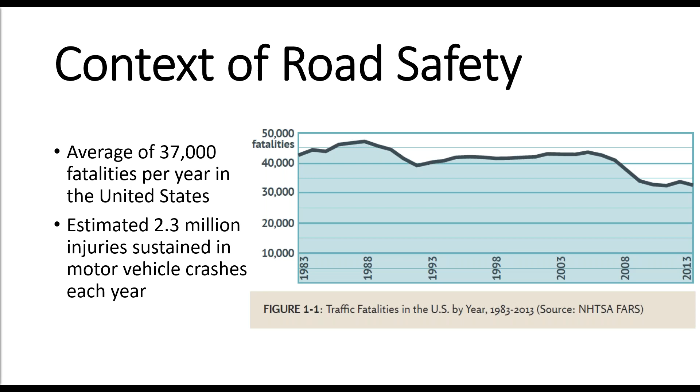Now, when you look at this graph, you can see how back in the late 80s, the numbers were peaking up pretty high, and we've dropped it down some. Over the last few years, it dropped a little bit more, but then it's trending back up again. So we need to continue to push it down, especially if we want to get anywhere close to Vision Zero, where we have no fatalities. And so that is where we want to be, but we're a long way from it when you've got 30,000 plus dying on the roadways each and every year.

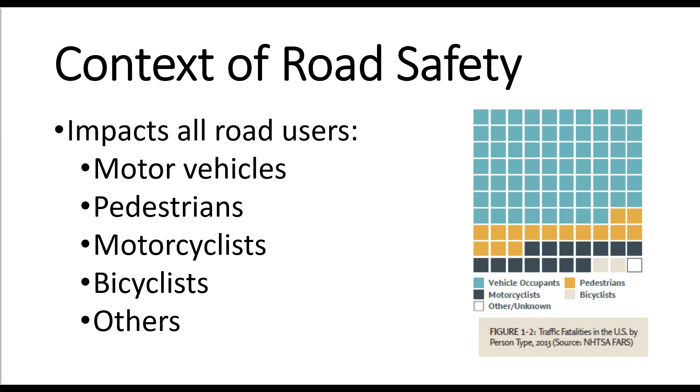It's really interesting when you consider the fatality rate, because we have so many vehicles and they're traveling so many miles. It's so easy to travel, with our interstate system and the great facilities that we have. I travel a lot, and may travel 400 or 500 miles a day sometimes to go to different places. But we've been so successful in making our cars safer and making our roads safer, we've dropped the fatality rate down to about 1.0 fatalities per 100 million vehicle miles.

And you can see back in the 60s, it was up over 5.5. So imagine if we had 5 times the fatalities that we have now. So instead of 37,000, close to 200,000. That would be just a national disaster. So it's good that our rate has declined, but the bad news is our rate of decrease is declining, that we're kind of bottoming out. And so we need to really come up with some new treatments, some new thinking to continue to push that down.

1 fatality per 100 million vehicle miles of travel may sound pretty good, but still 37,000 people is a lot of people dying each year on the highways. And so we still got a lot of work to do. And the only way we do it is working together and sharing information like this, learning and applying what we learn to make our roadways better.

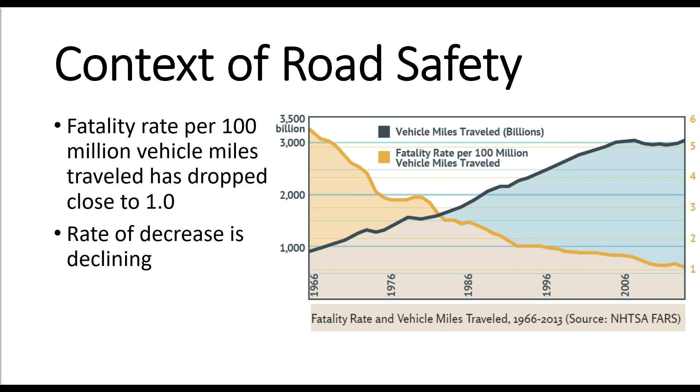Now, if you learn nothing else, we need to understand the difference between nominal safety and substantive safety. If you learn nothing else from this webinar, I hope you grab hold of this, because this is really important, and it is a different way of thinking than what we traditionally think. Nominal safety is just meeting the standards. One of the really classic examples is clear zone width. If you have something that's outside the clear zone, it's safe. But if it's inside the clear zone, it's unsafe. That's nominal safety thinking. And reality is, it's not like that.

So let's say you've got a freeway facility and a 36-foot clear zone. Well, if you have a tree that is at 36 feet 2 inches, that's really no different than a tree that might be at 35 feet 10 inches. Really the probability of that tree being hit is very, very close. In one case, I'm 2 inches outside the clear zone. In the other case, I'm 2 inches inside. In one case, you say, gosh, that's unsafe, and the other, oh, that's safe. And in terms of real crash experience, there's virtually no difference in that.

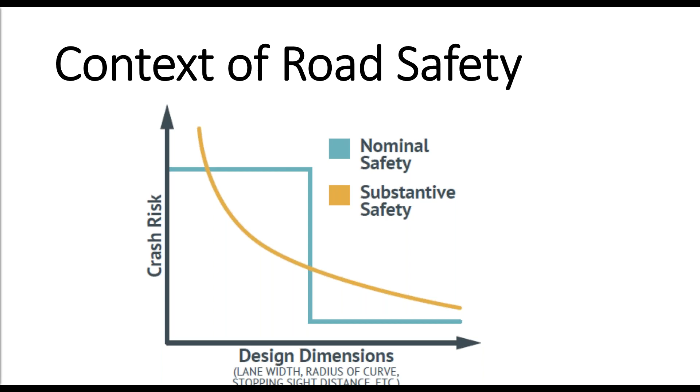We need to go beyond meeting the standards to, are we really providing a safer roadway environment? Are we doing the best we can to make the environment as safe as we possibly can? All right, so that's really the context of road safety.

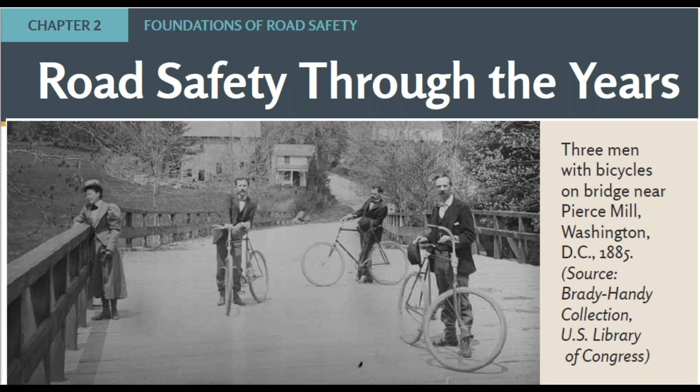And again, currently we're at about 1. So imagine again, 24 times the fatality rate. That would be something critical. And so it's good that we have reduced that fatality rate per 100 million VMT way down. And it's great that we've come from 24 down to 1. But again, we've still got a long, long way to go if we're going to get anywhere close to Vision Zero.

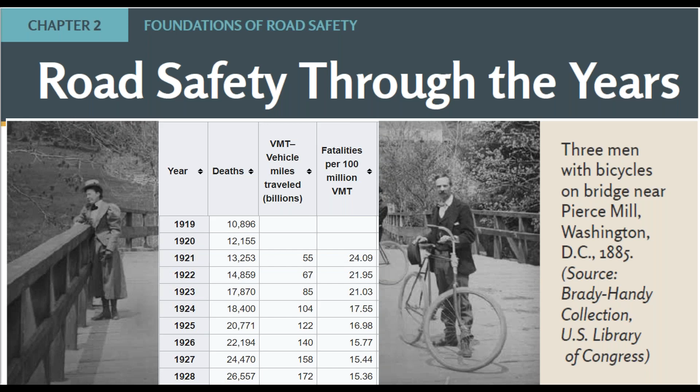And the great thing working with Rudy, it talks in the book about this first national conference on street and highway safety held back in the 1920s. Now, Rudy wasn't there, I don't believe, for the conference, but when he was at Federal Highways, in the archives there at Federal Highways, they had the notes, the handouts from this first ever national conference on street and highway safety. And Rudy's got some pictures in here from the handouts from that 1924 conference, and great history here.

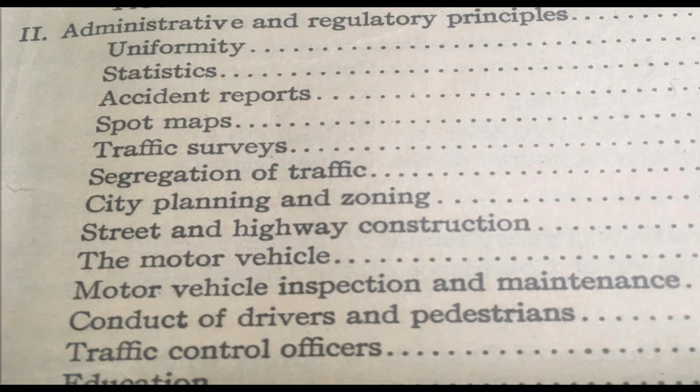And then they come up with suggestions for cooperative work, different associations, unofficial organizations; the automobile manufacturers had work to do, insurance companies had work to do. And so lots of different people, a multidisciplinary approach, and we still talk about that today, a multidisciplinary approach to this. And again, this is the foundation. This is how we started trying to make our highways safer.

A little bit later, 1954, a White House conference on highway safety. So again, it's at the presidential level saying, hey, we've got to do something to make our roadways safer. We need to do something nationally to improve the safety of the transportation experience in America.

Then it continued in 1966, President Lyndon Johnson signing the National Traffic and Motor Vehicle Safety Act of 1966 and the Highway Safety Act of 1966. So you can see over the years all the things that have gone into creating what is the Federal Highway Administration, NHTSA, and all these other things, and the Federal Highway Safety Program. And the book gives you a nice timeline of some of the different things that happened.

1893, the Office of Road Inquiry is created, which would eventually become FHWA, the Federal Highway Administration. And it's not until 1908 when the Model T is released, the first affordable automobile, due to what Henry Ford did in terms of the assembly line and mass manufacturing. Before 1908, before the Model T, only the really, really rich folks could afford cars. Everybody else was on horse and buggy and those kind of things.

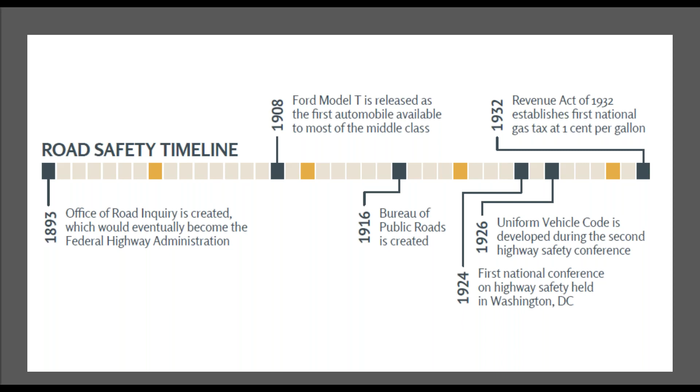1944, Congress approves the development of the National System of Interstate Highways. That's an interesting story in and of itself when you start really seeing where the interstate system came from. Basically, it was a big push by Eisenhower. When he was, I think, a corporal or something early in his military career, he was charged to take a convoy across country.

And the connectivity of the roads back then, when he was just a youngster in the military, was terrible. He would go from state to state, and some of the roads, there'd be asphalt for a while, then they'd turn into dirt roads, and then they'd suddenly end in some field somewhere. And so he'd have to turn this big, huge convoy of military vehicles carrying all this stuff all around, backtrack to find another road to connect. Because certainly back then you didn't have Google Maps or anything like that leading you. And so as he went from state to state, the roads didn't really connect real well.

And he remembered that. And when he was in World War II and saw some of the highways in Germany and how well connected they were and how easy it was to move troops and equipment, he said, hey, this is something we really should bring to America. And so the National System of Interstate Highways originally was largely designed to move troops and equipment in preparation for war. But again, you can see how much it impacts our lives today. Being able to travel on nice interstate facilities and go quickly from place to place certainly has impacted our lives drastically.

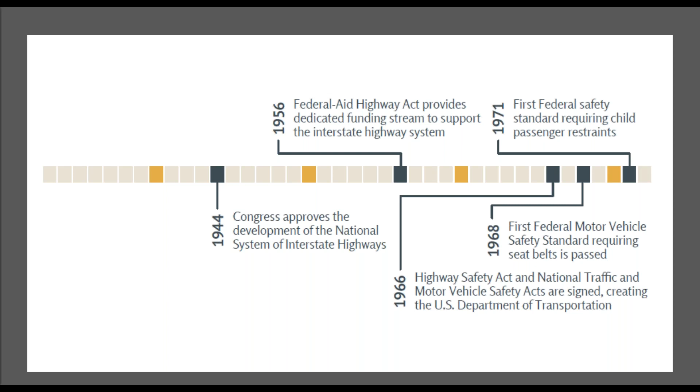In 1973, the oil embargo leads to the energy crisis and the national maximum speed law. Some of you may be old enough to remember when 55 was the maximum speed limit on the interstates, the freeways in America. 1974, the first safety standard requiring motorcycle helmets is passed. And then as we go on, ISTEA is passed, gas tax increased up to 18.4 cents per gallon. I believe that's the last federal gas tax increase that we've had.

1995, we repeal the national maximum speed limit, and so the states raise their speed limits. TEA-21 is passed 1998. SAFETEA-LU is passed in 2005. 2012, MAP-21 is passed, which brings us up to our current level of federal legislation. MAP-21 and SAFETEA-LU, those federal legislation did a whole lot to improve traffic safety and had a lot of funding specifically for safety programs, again, focused on making our roadways a lot safer.

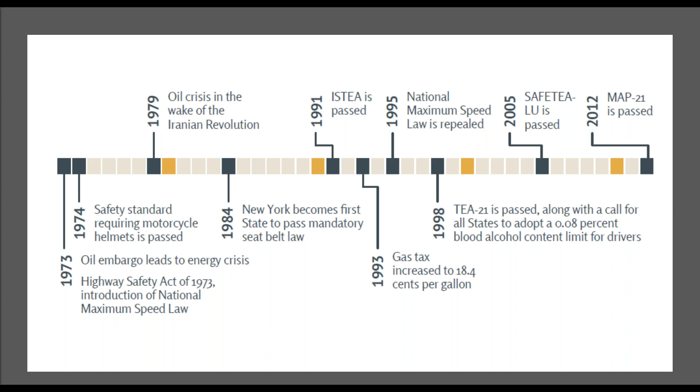All right, chapter 3 gets into multidisciplinary approaches, and talks about the 4 E's of safety. If you've been around safety for any length of time, you hear about the 4 E's of safety: engineering, education, enforcement, emergency response. And there is a 5th E, and the text talks about the 5th E being evaluation, that you evaluate your program and then continue to refine it. Well, I think each of those 4 E's should be doing their evaluation of how well their program is doing. I like to think of the 5th E as everyone else, because it doesn't matter how well we engineer it, how well we educate people, how severely we enforce it, and how great our emergency response is.

It really doesn't matter; if the people aren't doing their job, the drivers, the pedestrians, the bicyclists, if they're not thinking safety as well, our system isn't going to work well. And so really, I think the 5th E should be everyone else.

And I did a webinar a year or 2 back, I think, on the 5E approach to safety. And again, talked about that 5th E, which is everyone else. And again, we can do all the engineering we can, but if the people don't know what to do with what we engineer, don't know how to respond, or ignore it, then we haven't really done anything. And so we got to get everyone on board if we're going to get anywhere close to Vision Zero.

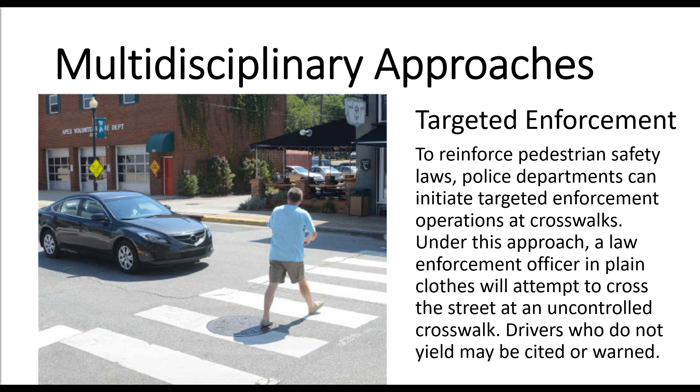But again, it is a useful tool for the law enforcement agencies to help people understand their responsibility as drivers to yield to pedestrians in uncontrolled crosswalks like that.

One of the other things, the Click It or Ticket campaign, it's a national campaign, and it really brings awareness to seatbelts, that seatbelts are required in most states, I think all states now. Seatbelt use is required, and it does really help the survivability of crashes if you are wearing your seatbelt. And so again, the Click It or Ticket campaign is all about just being visible and getting people's attention to, hey, go ahead and buckle up.

And it is something, like I said, it's a national thing. You see it all across the nation. Click It or Ticket, and you'll see it on the dynamic message signs as you're driving down the highway, and the police will get out there, the highway patrol will get out there and enforce it.

And we also want to mention Florida's Strategic Highway Safety Plan. One of the things in the history of the safety programs is that all states now are required by Federal Highway to have a strategic highway safety plan. And that was one of the things also in the download pod, Florida's current Strategic Highway Safety Plan. And again, we want to approach this strategically in a multidisciplinary approach, really trying to do all that we can, all the different people rowing in the same direction to try to reduce the number of crashes and reduce the severity of crashes on our highway system.

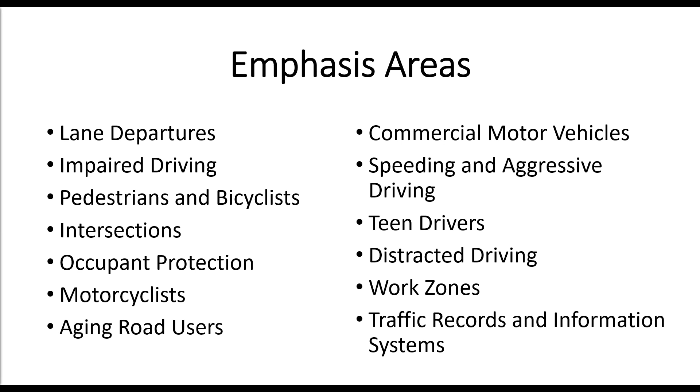All right, chapter 4, let's look at the road users. Road users includes people like passenger vehicle drivers and occupants, drivers of trucks and large vehicles, motorcyclists, pedestrians, bicyclists, and certainly others. You can include things like e-scooters, skateboarders. There's lots of other things out there that are road users that use the roadways for transportation. And each of them has different needs, different things that we may have to do to accommodate them.

And one of the things I always like to say when talking about roadway design is all of the road users, whoever they are, should know when to go, where to go, and how to go. That should be really clear. It should be something they understand when they're supposed to go, where they're supposed to go, and how they're supposed to go. The roadway environment around them should give them clear information, how fast they should be going, where they should go, at a traffic signal, when it's your turn to go, and those kind of things.

And so if we're going to have all these different people operating together in our road system, they need to know where they belong to be, where they should go, when they should go, and how they should go. And so that's an important part of really doing good design, is making sure that we really communicate clearly to the road users how they're supposed to use the road.

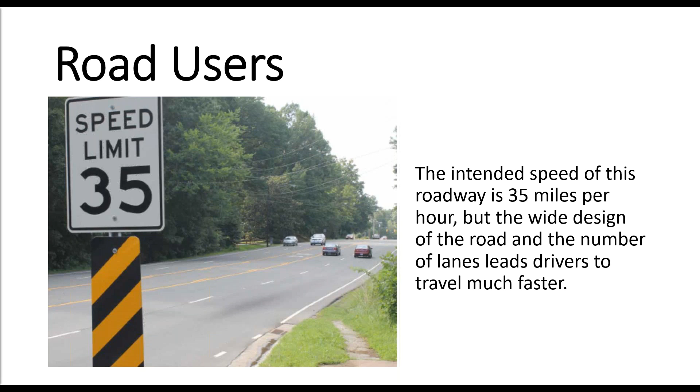And what they found by going to this road diet at this location is that it resulted in a huge decrease in the 85th percentile speed. It basically kept the same roadway capacity. The number of bicyclists on this corridor increased 35%. Pedestrian crashes declined by 80%. And so it made it a whole lot safer, made it better for all the road users. They know now where to go, when to go, and how to go.

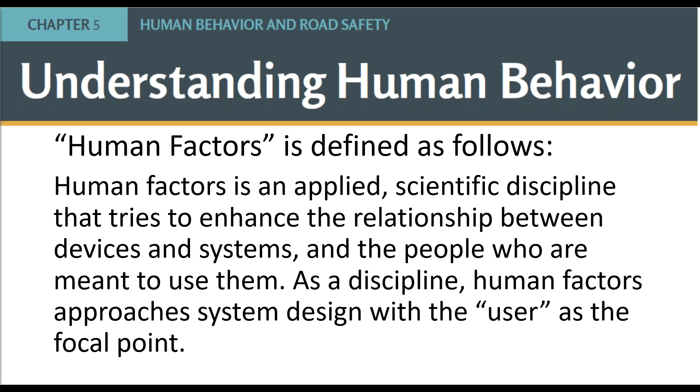Key principles: human factors, or human behavior, is guided by two different systems. Your behavior is guided by the intuitive system and the deliberative system, and we'll come back and talk about those in just a couple minutes. Humans are not exclusively logical, rational beings, even each person. Some days we're more logical and rational than others.

If we're upset at something, or we've had a really bad day, we may not think rationally, we may not act rationally. And if we're having a good day, maybe we're thinking rationally and logically, but other days we don't act so rational or logical. Human behavior is heavily influenced by the environment, by things that go on around us.

That's certainly true. And humans do make mistakes. We all do make mistakes. Either we're not paying attention, we're not thinking about what we need to be thinking about, we're thinking about something else, or we're not thinking clearly about what we need to think about. All of us as humans do make mistakes from time to time.

But one of the key things is the intuitive versus the deliberative side of things. The intuitive system is implicit. You don't really think about it. It's unconscious processing by which you make nearly instantaneous decisions and take a resulting action. Whereas the deliberative system is a conscious system wherein a person considers information using rational thought, logic, and reasoning in deciding on an action. So intuitive, you just know what to do and you do it. And deliberative, you've got to think about it and process it.

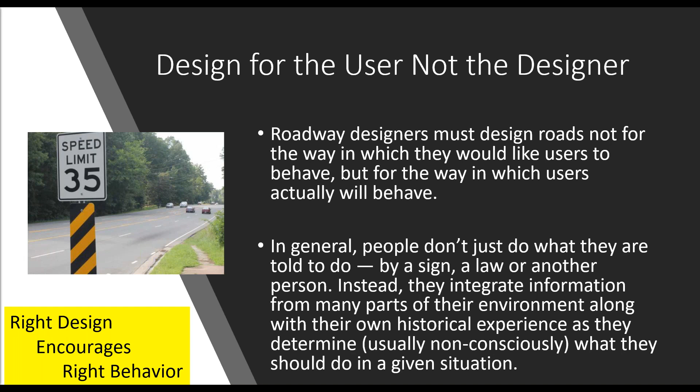All right, next chapter talks about changing human behavior. How do you change human behavior? Well, if you change the environment, you change things around people so that they make different choices. That's certainly one way to do it. Change the environment. You can educate them. You can provide safety messages and raise awareness, or you can do the brute force way, which is enforcement.

So, heavy police presence will get people to slow down on a roadway. I mean, like I said, welcome to Waldo. If you're familiar with Waldo in North Florida, they aggressively enforce the speed limit there. And people would typically drive a lot faster through Waldo, except for the fact they are known as a speed trap, if you will. And so when you see the sign, welcome to Waldo, you hit the brake and you slow down because they aggressively enforce the speeds there.

But that is really the brute force way, and something a lot of agencies really aren't willing to do, because people then complain, you should be out solving this crime or that crime and not just ticketing people. But I don't know, there's a lot of good research that actually supports it does make your community safer if the agencies are aggressively enforcing speeding. And we can talk about that later if someone has a need to or want to.

All right. Some of the things that do influence our decision making: what's convenient for us, previous experience in a similar environment. Sometimes we're under time pressure. We're in a hurry to get something done. If we've had education and know how to do things, our emotional state at the time certainly does impact things.

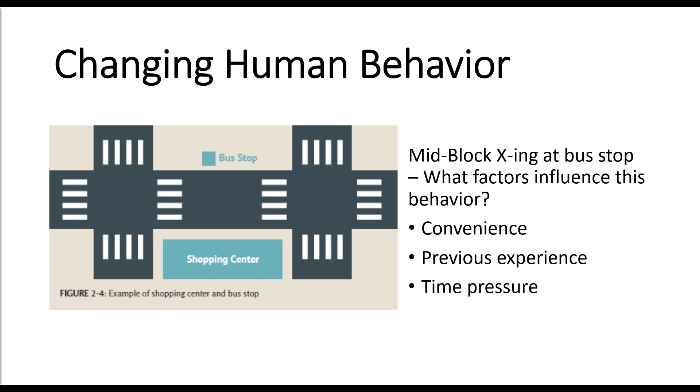And so how do we change that? That's a tough question, isn't it? And something we continue to struggle with. Again, like I said, right design encourages right behavior. And like we said, humans are not exclusively logical, rational beings. People generally don't just simply do what we're told. Changing behavior requires understanding all these influencing factors. And if you can't change the person, and usually you can't, change the world around them so that they will follow. So you have to change the environmental cues around them. Because again, right design encourages right behavior.

All right, that was quickly through Unit 2. Any questions there on what we covered? There was a lot of interest in the optical speed bars. Some follow-up questions that were coming up: Can they be used on tangent sections as well as curves? And are there studies showing their effectiveness on curves versus tangent sections?

I'm really not sure. Like I said, there is some information in the MUTCD about when to use it, where to use it. I've only seen it applied on curved sections where you're really trying to slow people down going into a curve because there's a history of people driving too fast and sliding out of the curve. And so it's something that's been implemented as a particular countermeasure in curves. I really don't know if doing it in tangent sections has really been studied.

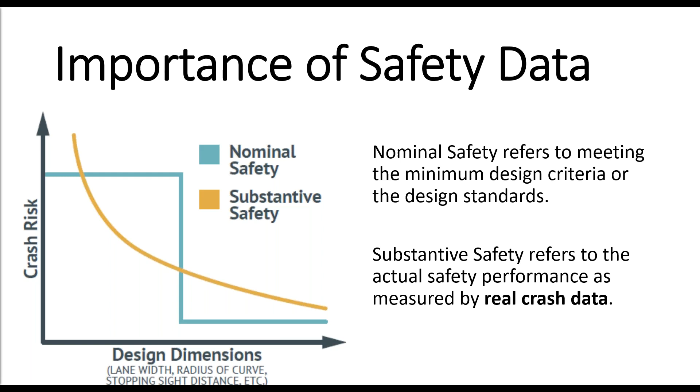The easiest thing to do is step up your analytics, your analysis of the data, because sometimes getting good data takes time and money. But again, studying a book like this book can help you do a better analysis. So even if you have low quality data, if you do high quality analysis, you can recognize the limitations of the data that you have, and you can still get some useful results that'll help you move in the right direction. But again, the thing you want to work on there is improving the data quality so you can make better decisions.

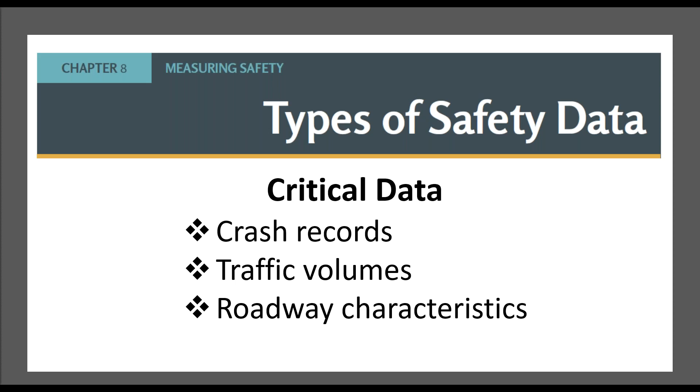And that's a data-driven analysis, and will give you the best type of response to the crashes that you're experiencing there. So the next chapter talks about the types of safety data. And some of the critical pieces of data are the crash records. That's where you really learn the most, is reviewing the crash records. What are the traffic volumes on the roadway and some of the characteristics of the roadway? And certainly the crash records.

And again, having good crash reports just really helps you figure out what's going on. What are the things I need to be looking for? What are the things that may have influenced this crash? And there's all kinds of things described on the crash report. What are the lighting conditions? Was it light or dark? Do we have street lighting? Is it a situation where you might have glare?

Then the weather conditions, is the road wet or is the road dry? Is it some other windy blowing condition or something like that? And so all these different things can impact what the correct countermeasure is at a particular location. What's the roadway surface condition? Were there heavy vehicles involved? Were there school buses involved? And all these different things help you identify what may have contributed to the crash, so that I can come up with the solutions I may want to try to reduce this type of crash.

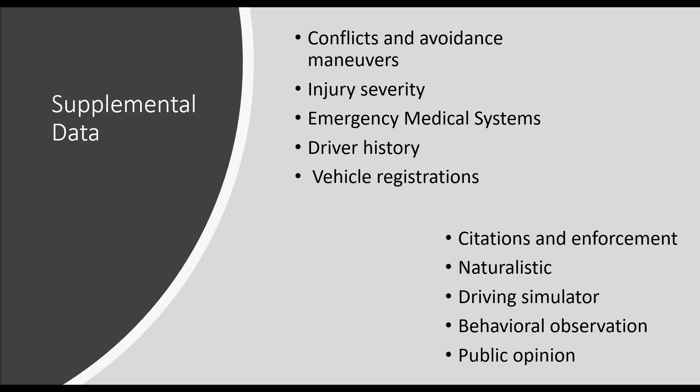In the crash data, again, looking at the crash form, you'll see a description of all the things that may have influenced the crash. The data collection process is something the police officers are trained in, what data to collect and how to collect it, and it's a very elaborate training that the responding officers go through for putting that data into the form. It's a very robust training they go through in order to know how to fill out that form.

We're going to talk about the common data elements, the MMUCC, and that's something, if you're going to be taking the RSP exam, you need to know what that is, and we'll talk about that in a few minutes. Whenever you have crash data, what are the sources of data and who keeps the data? And is the data safe and secure, and is it reliable?

We'll be talking about the transportation safety applications and coordination of the data with other agencies. And we'll talk some about the data challenges and the gaps, because that's always an issue. What gaps do I have? Where am I missing data? What's the data that I don't have that would help me better understand the crashes?

Traffic volume data: typically, we have AADTs, the annual average daily traffic, for most of the roadways in Florida, at least the state roads. The DOT tries to maintain a database of that information. The AADT is the annual average daily traffic. Basically, you take the total number of vehicles that go across that section of roadway over the course of a year and divide it by 365. Of course, for 2020, you would divide it by 366 because we have a leap year, but it just assumes a uniform number of vehicles per day throughout the year.

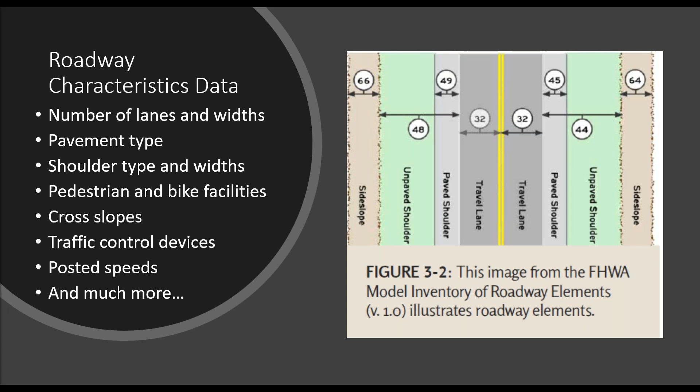And really, the types of safety data we need: traffic volume data, crash data, and road data. So we need the crash reports, how many vehicles or pedestrians or bicycles or trucks are out there, the volume data, and what the roadway looks like. All three of these realms are important data to analyze if we're going to figure out what's going on and understand the crash experience we're seeing there.

All right, Chapter 3 talks about improving safety data quality. To have good safety data, you need timely data. That means it's fairly current. For many, many years, the crash data we got was not timely at all. It would take 3 or 4 years before we got the crash data, and by then you've already done something to the roadway or something has happened and changed things. So you really need good timely data, as current as you can possibly get it.

It needs to be accurate. It needs to be complete. That's one of the things with the Florida crash form. I forgot how many data fields are on it, but there's lots and lots, hundreds. And the officers get tired of filling all that stuff out. But you need all those things filled; it's all useful information on that form. So the crash data needs to be timely, accurate, and complete.

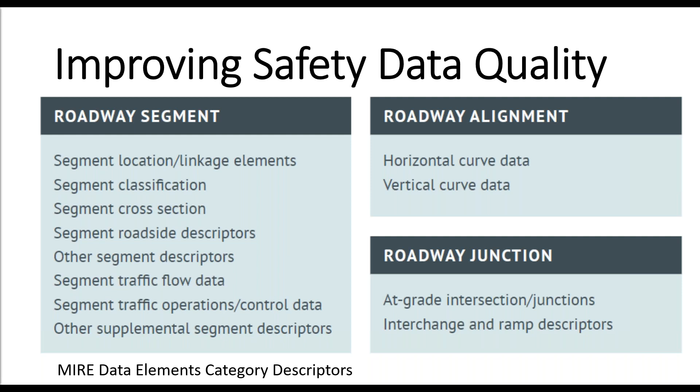And roadway segment data, the alignment of the roadway, are there horizontal curves, vertical curves, or is it an at-grade intersection, and so forth. And so again, MIRE is basically the same thing as what we saw with the MMUCC, uniform data, in this case describing the roadway elements. That's what MIRE is all about. All right, that was Unit 3 real quick. Any questions, Anthony, on Unit 3?

There's a comment in the chat saying that people have had different experiences. There's more than one comment in there saying that they've looked at different locations and different municipalities, and the inconsistency in the crash data is frustrating, with regards to the conditions of the roadway and things of that nature. So the efforts to standardize that are definitely welcome.

Yeah, absolutely. Different cities and different municipalities had different standards and different quality of crash data. And that is the real emphasis behind some of these things, the MMUCC and the MIRE, is to standardize these things so we are all talking from the same frame of reference. So, is there a list of compliant states that these guys develop? Here's the minimum number of required fields for a crash report form, and then states can add to it, or how does that work?

I believe they are tracking some of that stuff in the roadway safety fundamentals document. It talks about MIRE and the MMUCC in some detail, and it points you to, I think, some websites that talk about states that have fully implemented it and where the different states are in implementing it. So again, I'd point you to the text. The book has a whole lot more information and points you to websites and other reports that could really answer that question better than I can.

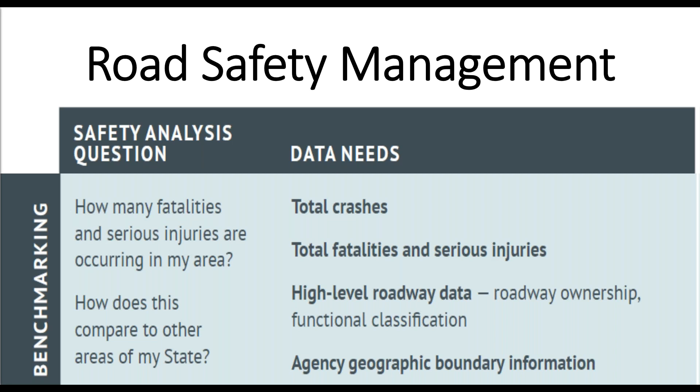What types of road users are involved in crashes? When are the crashes occurring? What are the major contributing factors to crashes? And the data needs that you have to try to answer those. What's the crash severity? The crash incidence data, time of day, is it raining or is it dry, night, day, that kind of stuff. What type of crashes are we having, and what are the contributing factors? Again, that's the kind of stuff that's on the crash report. The officer has to fill out some of the contributing factors based on what he observes and the witness statements that he gets there.

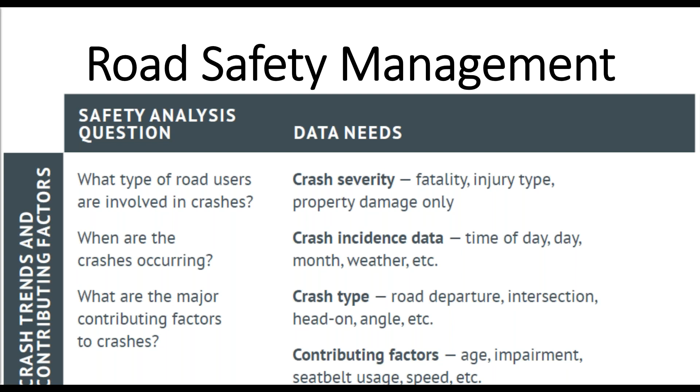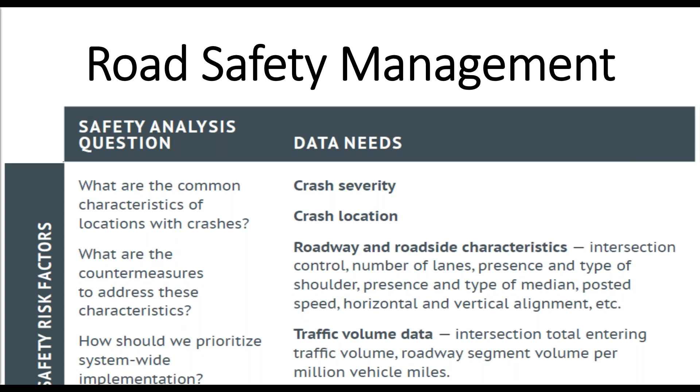If your question is, what are the common characteristics of the locations with crashes? That's a really excellent question to pursue. What are the common characteristics that I might see at locations that are experiencing crashes? Well, you need to know the crash locations. You need the roadway characteristic information, traffic volume data, and then you can start to assess some things that might be contributing to crashes at those types of locations. And so then what are the countermeasures to address those types of crashes, and how should we prioritize their implementation? This is part of the road safety management process.

And then you always follow that up with how effective was I? You measure, you evaluate the effectiveness of the change that you made, and the process starts over again. It's an ongoing process, and that's the only way, again, we're going to ever get close to the goal of Vision Zero, is we make these improvements. Hopefully it reduces crashes, but there's still crashes out there. We've got to then start over again.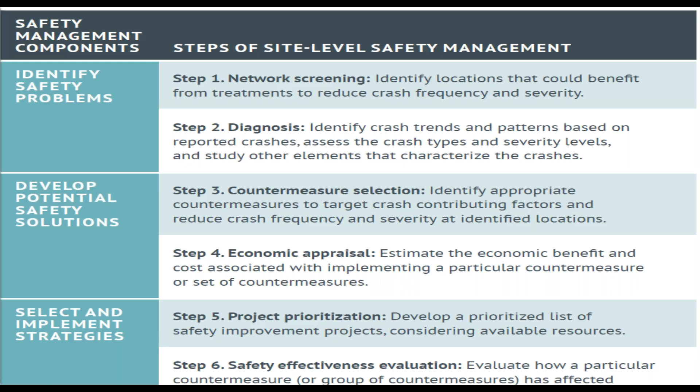If your performance measure is just the average crash frequency, how many crashes are we getting there every year, that doesn't really account for traffic volume, doesn't really account for regression to the mean bias, and doesn't really account for crash severity if all you're looking at is number of crashes. But as you look at other performance measures, the crash rate certainly does account for traffic volume, certainly does not account for regression to the mean bias, does not explicitly account for crash severity.

Some of the other things you can do, the EPDO, equivalent property damage only crash frequency. Basically what you do there for the EPDO, you say that each fatality is worth a certain number of property damage only crashes. And so one fatality may be worth hundreds or thousands of property damage only crashes. An injury may be worth a few hundred property damage only crashes. And so what you're then doing is weighing those more severe crashes more heavily. And that certainly does account for crash severity,

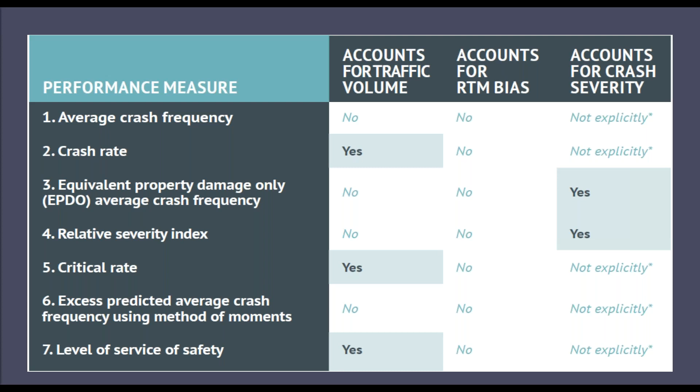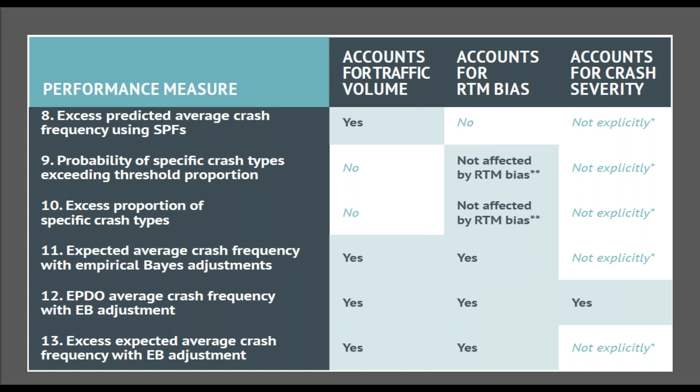And here's a few more here. Number 9, the probability of specific crash types exceeding some threshold proportion. Again, you can see it doesn't account for traffic volume, not affected by regression to the mean bias typically, and not explicitly accounting for crash severity. And so you can see there's a lot of choices you can make as the crash analyst. What is my performance measure going to be? And does it account for the traffic volume? Does it account for regression to the mean bias? And does it account for crash severity? And so again, that's just a helpful table there to really help you with network screening and your performance measures.

The document shows a couple of SPFs graphically here for, in this case, multi-vehicle crashes on rural 4-lane freeways. And you can see the SPF would be the green line, and all the data points out here are scattered all over the place, but they're all analyzed into a single SPF, which again is the green line running through there. But you can see there is a lot of variation in the data, and that is something that we must understand. We're taking data from a variety of different states that have different roadway design experiences and different weather experiences and other things, and that's how we get the safety performance functions that we use in the Highway Safety Manual analysis.

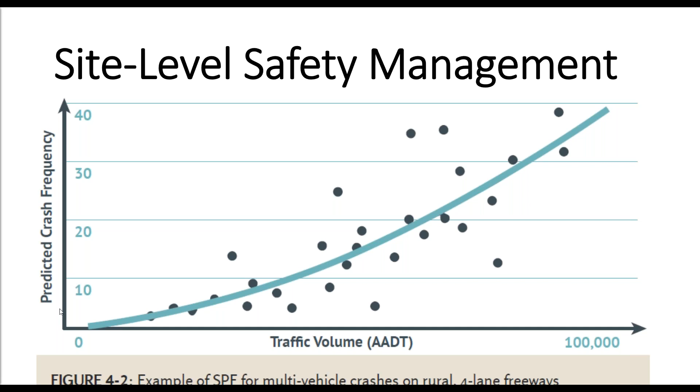And it is important that we as practitioners be aware of how much variation there is in the data. Here's a similar type figure for single vehicle crashes on rural 4-lane freeways. And again, there's a lot of spread in the data, but the SPF gives you, if you don't have anything better, the best available number to predict the crash performance for that type of roadway.

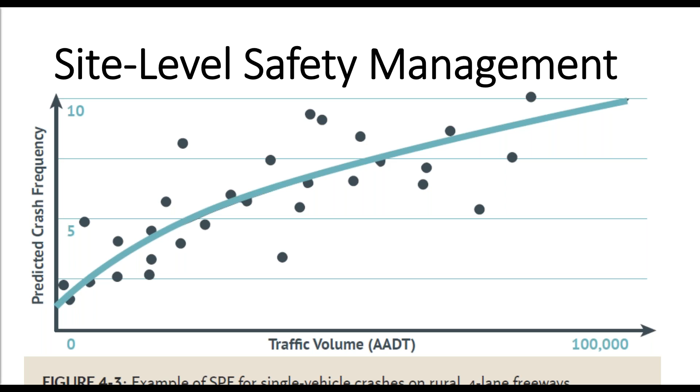And again, the way that you use these and analyze those, the SPF gives you a number. Based on the AADT, you can estimate or get a predicted crash frequency. If you also have good crash data, the little triangle at the top is the observed number of crashes. And so your observed number of crashes in this case is up above the SPF, the safety performance function value.

And so using what's called the empirical Bayes analysis, you get the one in the center, the diamond-shaped data point, and that's what's called the expected number of crashes. And the expected number is the blending of what's predicted by the safety performance function based on other locations that have been studied and your observed number, and it blends those together to come up with what's called the expected number of crashes. And again, this is site specific. You're looking at your site level safety management.

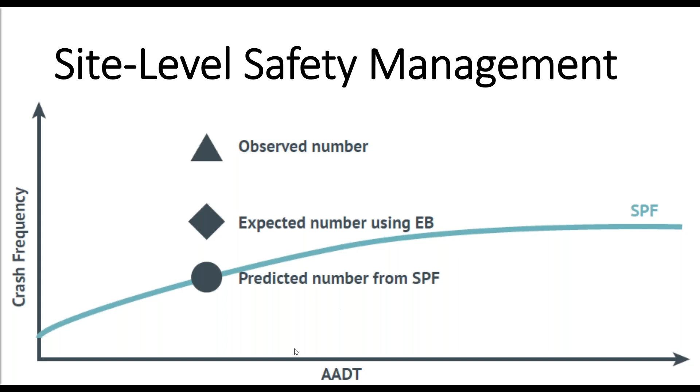And again, you're blending my historical data that I've observed with historical data from other locations that are hopefully similar from the safety performance function. And I'm getting what should be what's called the expected number. And this all has to do with what you'll hear people talk about, the regression to the mean. And using the empirical Bayes method, hopefully we take care of regression to the mean.

Well, using the empirical Bayes method, again, what you're trying to do is come up with something that should be closer to the long-term average, because you're blending your data, which hopefully you've got a short-term average, and averages from other locations into something that hopefully is close to the long-term average.

And again, the regression to the mean, what it really is talking about is the data is highly variable. It's going to vary all over the place, but one year it's going to be real high and you think, oh gosh, things are terrible, when nothing's really changed. You just had a low year the year before or something like that. And the next year may be real low and you think, gosh, we did something really great, when you really didn't do anything. And again, it's just due to the natural fluctuations.

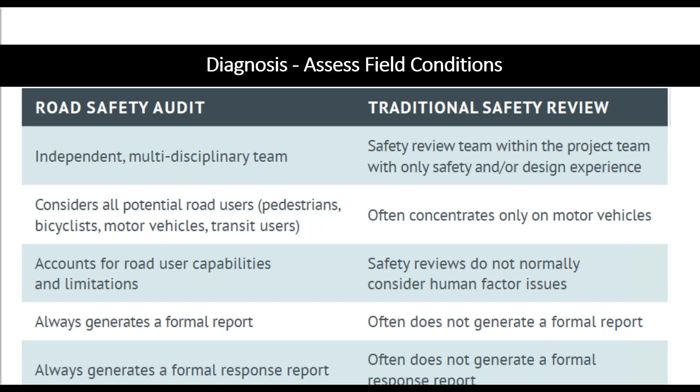Now, this is something in the chapter here. If you plan on taking the RSP exam, I'd recommend you study the Haddon matrix. I had never heard of the Haddon matrix until I opened this up when I was studying for the RSP exam. And what the Haddon matrix is all about is it's looking for some of the contributing factors to a crash. And it talks about some things pre-crash, during the crash, and after the crash. What are the human type contributing factors, the vehicle contributing factors, the environment contributing factors, or perhaps socioeconomic contributing factors that may have contributed to the crash.

And so, for instance, if a person has poor vision or poor reaction time, or they've been drinking, or they're speeding, they're driving aggressively, those kind of things, that's something all human related pre-crash. And so if all those kind of things are going on, or some of those things are going on, then that certainly does contribute to a crash occurring. And likewise, on the vehicle side, if your brakes aren't working right, if you're missing lights, or other things like that, that could certainly contribute to a crash or the potential for a crash. That's certainly a pre-crash type contributing factor.

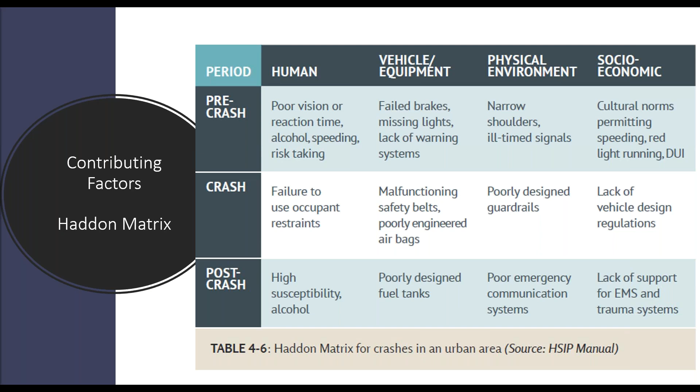All right, if you've done any highway safety manual type of studies or anything related to the highway safety manual, you've probably heard of crash modification factors. They are multiplicative factors used to compute the expected number of crashes after implementing a given countermeasure. And so if your CMF is less than 1, you should be expecting fewer crashes. If your CMF is greater than 1, you're expecting more crashes. But if your CMF is 1.0, then you've done nothing. You'll have the same number of crashes in the future as you did before.

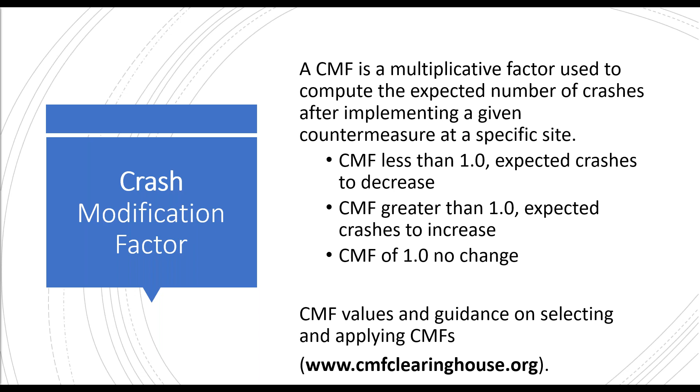The CMF Clearinghouse, if you've not ever been to the CMF Clearinghouse website, tons and tons of CMFs, crash modification factors there. Be very careful when using them. I did a webinar a couple years back on the use and misuse of CMFs. I would refer you to that. It's on the LATSA website. You can access that webinar. And again, you just have to be careful when using those CMFs. Make sure you're using them appropriately and properly. All right.

Now, economic appraisal of these safety things. Net present value is one of the more common ways to analyze them now, but certainly to do that, we need to compute benefit cost ratios and analyze, is this a positive improvement we're making? Does it have a good benefit cost ratio? And typically, if we're going to get federal funding, we want at least a BC of 2.0, but certainly anything above 1.0 is good, but we like to have an extra margin of safety just in case the cost side is underestimated. And then we want to look at cost effectiveness index, and that's discussed in there.

How effective was this in really reducing crashes? And so essentially, what's the cost per crash reduced? And were we effective in using the money to save lives and reduce injuries?

And the safety effectiveness evaluation, again, we want to make sure that what we're doing makes sense. And so there's a couple different experimental ways to analyze projects and make sure, again, that we're using money wisely, that we're getting good data, and that we're really reducing the crashes that we want to reduce, and we're effectively using the safety dollars. The two broad categories, like I said, experimental or observational type of evaluations.

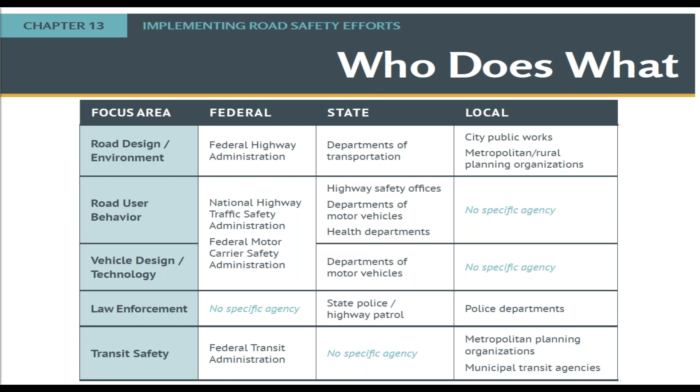The next chapter, who does what? When we're talking about implementing our road safety effort, who does what? For different areas, you can see the chart here lists who implements things from the federal side, the state side, or the local side, who are typically the responsible offices for road design or the environment. At the federal level, that's federal highways, the state DOTs, and at the local level, city public works or county public works or whatever. And so those are the people typically involved in those things. And you can see here for all the different other focus areas who the agency is, federal, state, and local level.

All right, now looking at road safety research. A lot of things in road safety research, and we need a lot more good road safety research, and that's one of the reasons why we focus on collecting good data and then analyzing the backside of it, because if we can get good crash modification factors, that helps us in the future to develop better projects. So in road safety research, we want to collect all the data on the people involved, the vehicles involved, the roadway environment, and make sure we're doing the right research to come up with the right countermeasures, to come up with the right safety effects and safety treatments to reduce crashes.